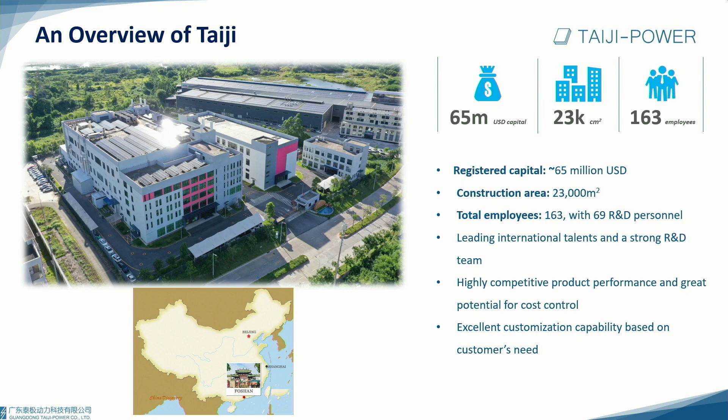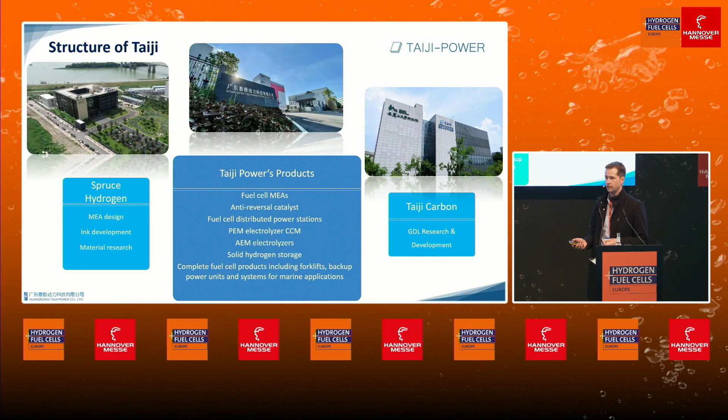We're located in Foshan, which is a relatively small city in China of around 8 million people. But if you're not familiar with Chinese geography, it's close to Hong Kong, Shenzhen, Guangzhou, in that area. There are three main entities at Taiji. There's the main manufacturing facility and our headquarters, and that's where we produce fuel cell catalyst, electrolyzer catalyst, fuel cell MEAs, electrolyzer CCM, and we can now also offer complete fuel cell systems as well as an AEM system that I'll be talking about near the end of this presentation.

About 30 minutes from the headquarters is a research facility called Spruce Hydrogen Energy, and this is where we do all of the materials development, so catalyst design and catalyst layer, MEA design. And as we have promising technology, that gets transferred to Taiji for high volume manufacturing. We also have a third entity called Taiji Carbon that's really focused around carbon development, specifically for GDLs. We've generated a lot of core IP for our company, and this IP spans core components all the way up to some of our systems.

We've also received within China numerous awards, both provincially and nationally, but for an international exhibition such as this, the most important thing to probably highlight is our quality certification. So we have, for example, IATF certification that allows us to supply into the automotive industry, and we've now been doing this for several years. We also have other ISO certification that allows us to, for example, supply into the marine industry, which is also something we've been actively doing.

So I mentioned that we now have products that span most of the hydrogen value chain, and I'm just going to highlight where that is. So in terms of hydrogen production, we can offer catalysts, so the OER catalyst and the platinum carbon catalyst. We can also offer PEM electrolyzer CCM, and that's been a really growing product for us. There's been a lot of demand for that CCM. Also, if you come to our booth, you can see we have a complete AEM system that we can offer, a turnkey solution. So those are all the products really within the hydrogen production space.

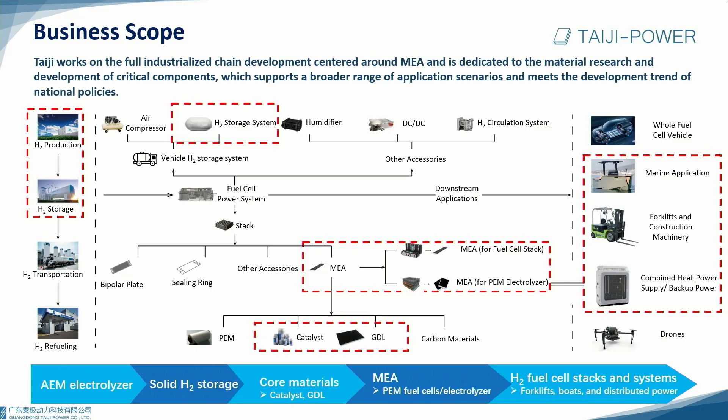We also offer hydrogen storage solutions, and for Taiji, we're focused on metal hydride storage. That's something that we use in our own backup power systems, and I'll be speaking about those a little bit later in these slides. But we can also offer that as a discrete product, just the metal hydride storage unit.

One of our core products has been and continues to be the fuel cell MEA. So supplying fuel cell CCM and 5 and 7 layer MEAs. Recently, we've been exporting a lot of these internationally. Initially, our market was primarily China, but it's now been growing with a lot of additional overseas customers. And then finally, we do offer complete fuel cell systems. And again, I'll touch on some of these near the end of this presentation.

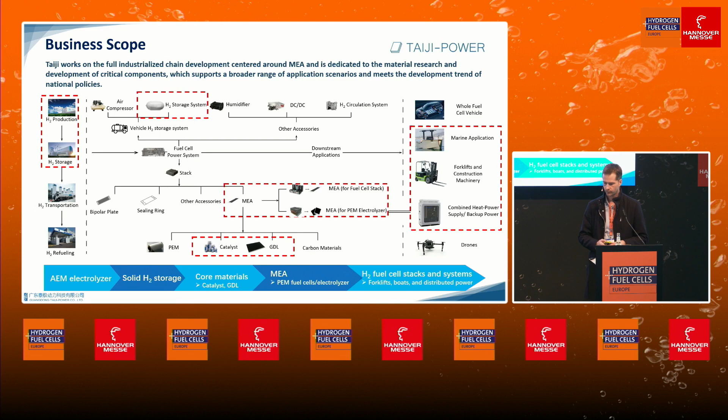So I don't have time to go through all of the different products that we offer, but I'm going to highlight a few, starting from the materials level all the way up to some of the systems. At the materials level for Taiji, our initial focus was on developing carbon or highly durable catalysts for the anode of the fuel cell. And that's because within China, at the time when we set up our company, there really wasn't anything available. So if you're familiar with fuel cell technology, you'll know that at the anode, there's two catalysts that are used. There's a very durable platinum carbon catalyst, and then typically some water oxidation catalyst to handle reversal events. So we've developed our own materials for that, and we use them in our own product. We also sell them as a product.

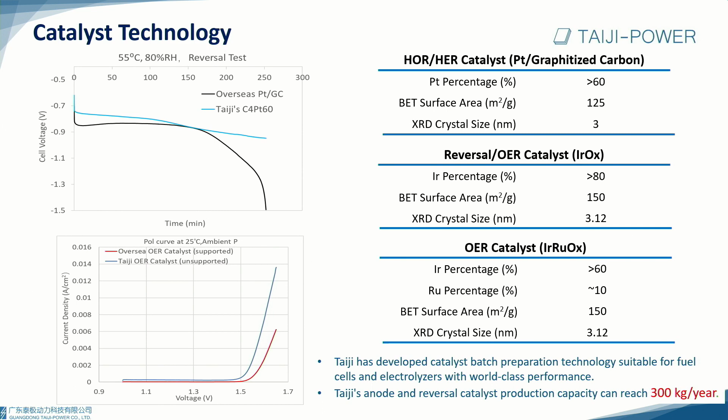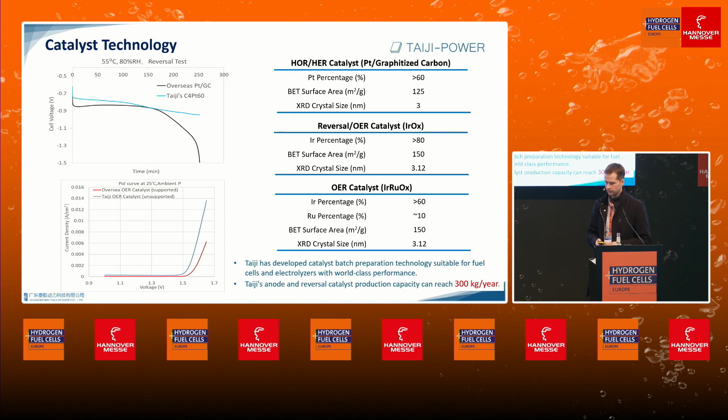In the recent years, since we started also producing PEM electrolyzer CCM, we can utilize those exact same catalysts for the PEM electrolyzer. So the iridium and iridium-ruthenium alloys, we use that on the anode of our own electrolyzer, and then our own platinum carbon on the cathode. We can produce about 1 kilogram batch sizes of those catalysts, and we also have a comprehensive suite of testing capability so that we can also offer a very comprehensive C of A with all the standard quality requirements you would expect on a C of A.

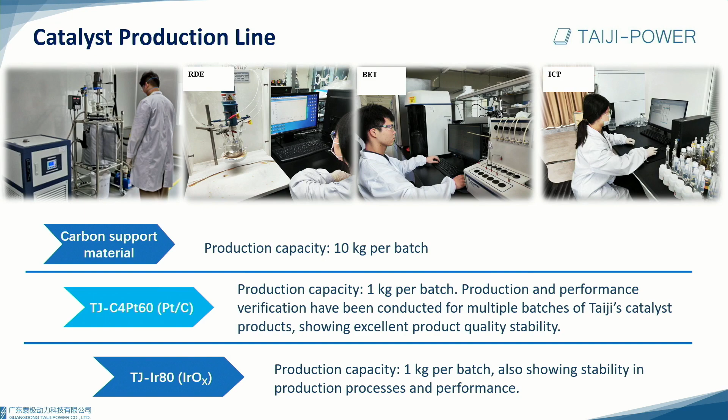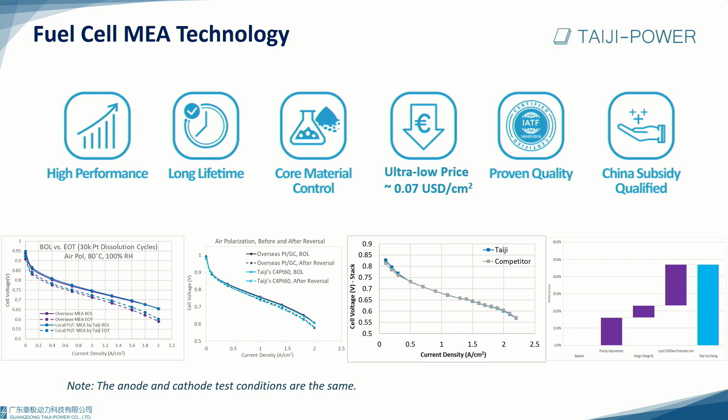In terms of the fuel cell technology, a big focus, as I mentioned for us, is around localization of components within China to help keep our costs low. So we utilize our own anode materials, and we also have partners in China for the cathode catalysts, including Jiping, which has a booth at this fair. In terms of the membrane, we can use multiple membrane suppliers, but we predominantly use Dongyue membrane, which is the largest membrane supplier in China. They're also an investor in our company, so we have a very close relationship with them. And through this relationship and by controlling our own catalysts, we have an excellent overall control on our supply chain to keep costs low and also give us cost certainty. And we're able to do this while still achieving world-class performance and durability.

For the PEM electrolyzer technology, one unique advantage we have is the ability to coat large sheet sizes. So as the PEM electrolyzer technology progresses, there's a bigger and bigger demand for these large industrial size coatings. And we're able to produce up to 1.4 square meters. And for these electrolyzer CCM, again, we mostly utilize our own catalyst and the Dongyue membrane. But we do have some customers that insist on a different membrane supplier, and we're flexible and free to do that. But as soon as you switch away from Dongyue, the price will start to come up.

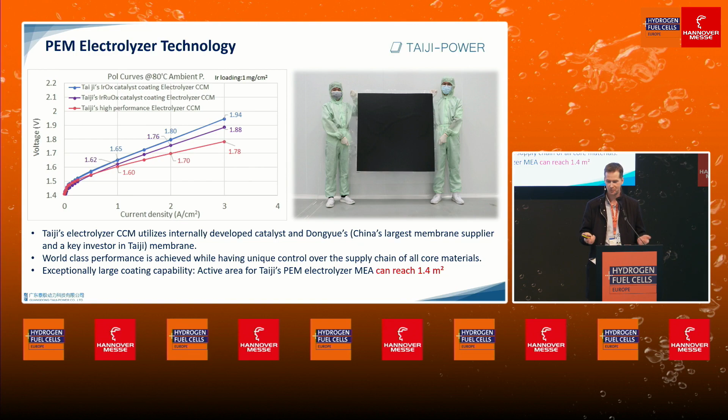For manufacturing capability of fuel cell MEAs, we have 2 discrete lines. And together, we can produce around 4 million MEAs per year. So this would be the 7-layer fuel cell MEA. We also have our own coating technology that we developed to make the large sheet sizes for the PEM electrolyzer, and that's, as I said, up to 1.4 square meters. We can also use our roll-to-roll slot die coater to make electrolyzer CCM, but it's difficult to get that up to the very large sizes.

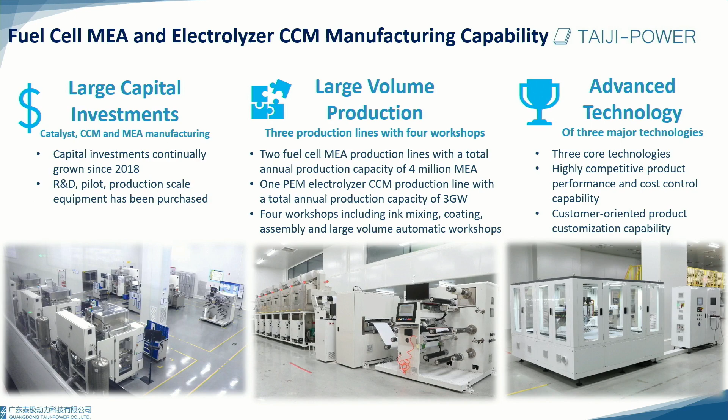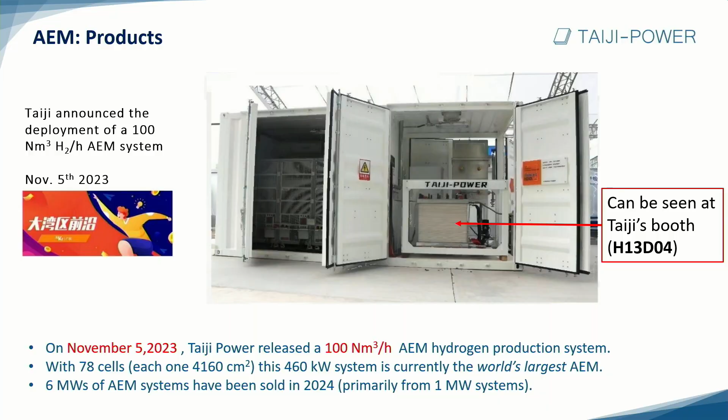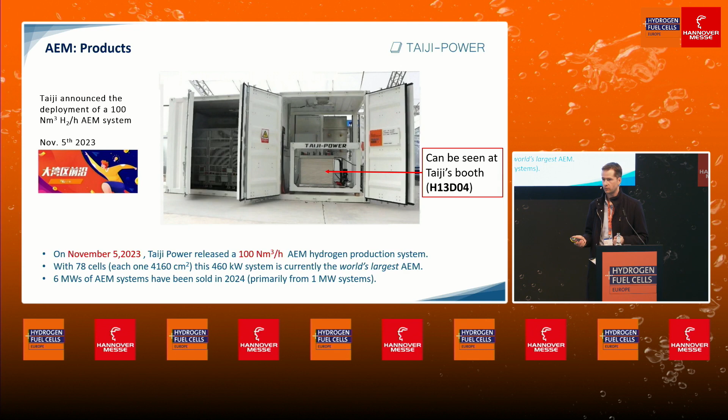A very exciting announcement for our company at the end of 2023 was this AEM system that we've released. And if you come to our booth at D4 at the entrance to this building, you can see we brought one of the demonstration units. The one that we brought with us is 460 kilowatts, but we can produce up to 1 megawatt AEM systems, and we can offer a complete turnkey solution.

The technology that we've developed for our AEM, we have a team that's continually working to improve the performance, but I believe we're already at globally competitive levels for performance. And like most AEM companies, we're still early in obtaining the durability data, but we've run this out several thousand hours now. One of the advantages of the AEM electrolyzer stack, though, is that if it does degrade, replacing the individual MEAs in there is relatively inexpensive to do.

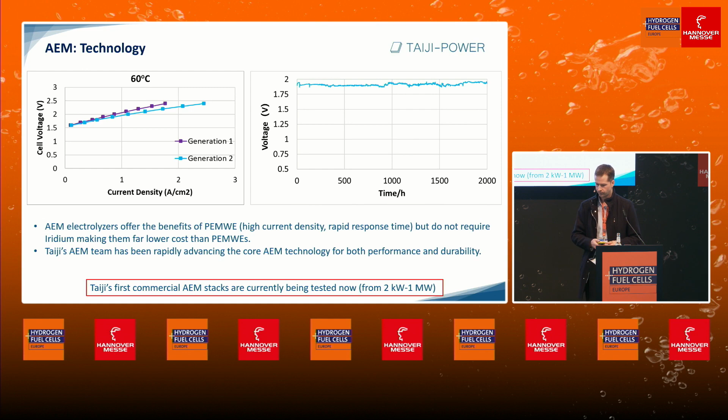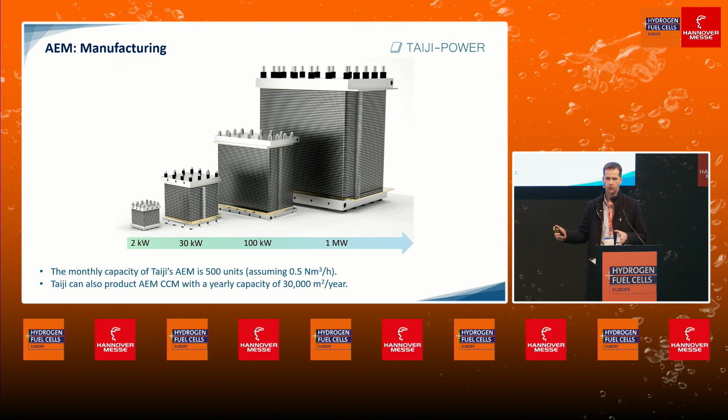In terms of our manufacturing capability of these AEM systems, we can go from several kilowatts all the way up to 1 megawatt. And since making our announcement, we've now sold about 6 megawatts worth of these units in China. And if we get to multi-megawatt units, what we do is just attach together our single megawatt units. So that's for making hydrogen, and then for storing it, as I mentioned, we use a metal hydride storage solution. And for that, we can range in size from about 3 kilograms all the way up to 100 kilograms.

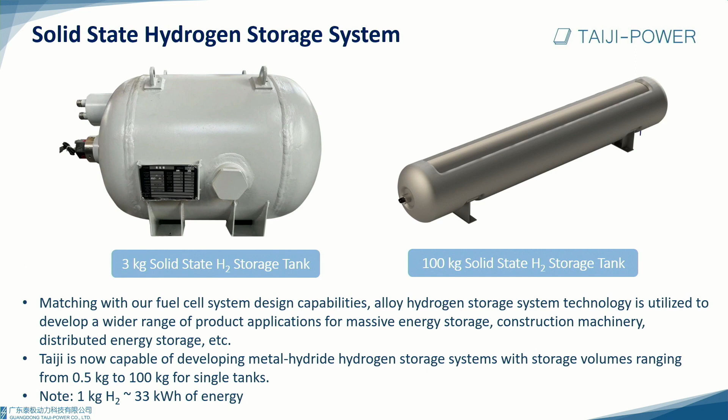Taking all of that, then, we have 2 main products that we've released this year for fuel cell systems, one being the backup power and one being distributed power. And briefly, the difference between them is that the backup power unit is a fully integrated unit with an AEM electrolyzer, a metal hydride storage system, and then a PEM fuel cell system.

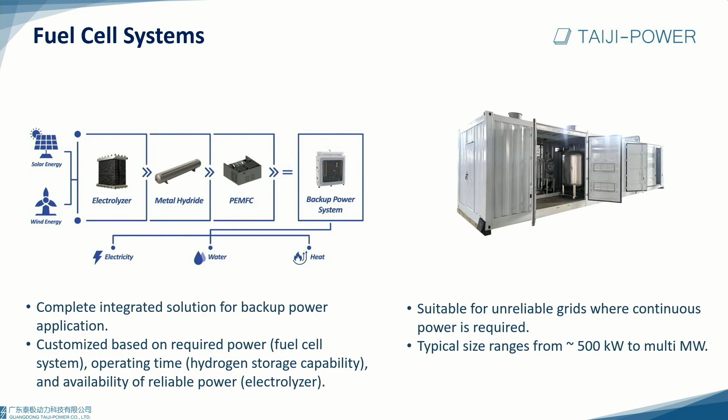Alternatively, if you have an unreliable grid and you want to completely disconnect from the grid and have your own continuous power, we also have megawatt units. And this is a new product that we've released in China. We've sold just several of these starting this year.

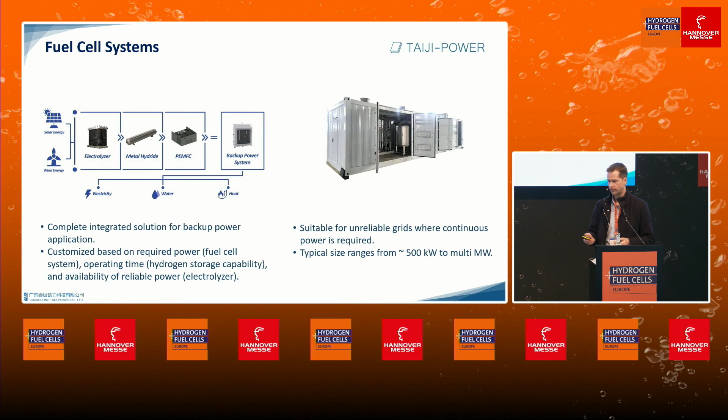Okay, so those are some of the products, and then I just wanted to end by touching on a really exciting collaboration that we started this year. In 2023, we started engaging conversations with Bambili Energy, which is the parent company of HyPlat, the leading fuel cell company in South Africa. And as we had further and further discussions, we started finding a lot of synergies between the companies and overlapping skill sets and also complementary skill sets between these two groups. And so it's progressed to the point now where we're in a formal collaboration with Bambili.

And briefly, what we're bringing to the table, so I spoke already earlier in this presentation about some of our capabilities. At Taiji, we have the high volume manufacturing ability and a very secure supply chain of low-cost Chinese components. So we're bringing that, and then at Bambili, they have already very strong fuel cell technology. They have a really strong business team in place.

And also, if you're familiar with South Africa, it's just an incredible opportunity for renewable energy. They have control over the vast majority of the platinum and iridium in the world. They have an abundance of solar, an abundance of wind, and also, unfortunately, an unreliable power grid. But when you combine that all together, it's just an amazing launch pad for fuel cell and electrolyzer technology.

And so what we're doing together now is setting up high volume manufacturing with Bambili in South Africa so that Bambili can start exporting at high volumes their MEAs. And the other advantage there is that South Africa has more favorable trade agreements in many cases with other countries than China does. So it's just a really good partnership. And again, if you have any questions about this partnership, we welcome you to come to our booth.